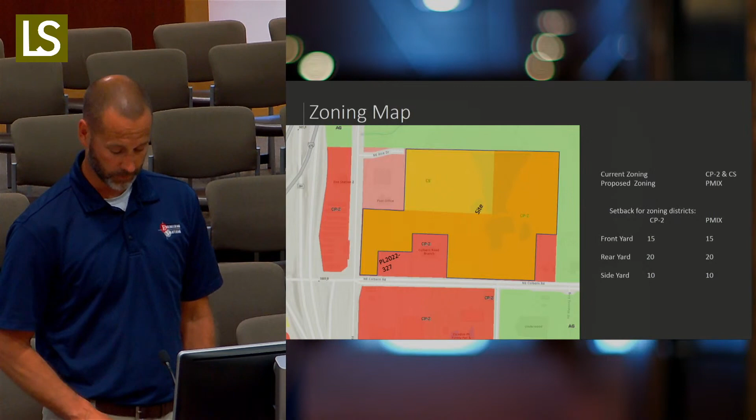We're asking for no modifications for the setbacks, no changes. CP2 standard zoning requirements for the setbacks are completely fine. And the density, there's nothing special on that side.

The comp plan overall shows this as kind of the start of the PRI ground to the north. So this starts to put in some of the road network, some infrastructure, and shows the overall ground as kind of a commercial use. It shows the PRI ground to the north as more of an industrial use, and as we walk through our plan, what we've come up with is a little more of a mixture because there are still some residential components down in that area.

Additionally, we don't believe that commercial development on the entire site is probably the best choice. So what we did is come through on the 37 acres, and again, Rice Road and Colbern's kind of down in the southwest corner looking up at our site.

The C-store or the Heartland Market that you saw is directly to the west of the library. On the westerly and northerly side of that will be some type of office or office warehouse use, staying compatible with the types of uses that are in the area. To the west we have the indoor storage facility, the fire station, the post office, and that marble store that sits on the corner.

The companion case you'll see in a little while will be the senior facility, and we'll talk more in detail about that as it goes along. The common area in the middle will be the retention facility and uses to control stormwater for the overall development, as well as a good portion of the watershed that currently drains through that area.

We've also put in some residential uses, kind of the higher density apartment type use that would be compatible with the senior use as we work to the east. We have some townhome uses on the far east side, expecting that could continue to the east, but this is the end of our property, where the church boundary is.

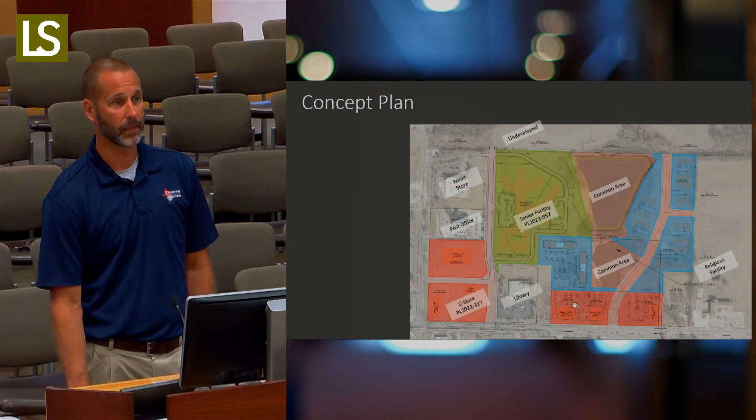Then on the south side, we're currently showing some office, medical offices, something in that version. 12,000 to 14,000 square foot buildings is the idea, individually owned or used, potentially multi-tenant, but mostly some type of office or medical office on that side.

The Heartland Market, which you've seen and already approved, is getting closer to construction. The senior facility, which again we'll talk about more, gives a start of the idea of what we're thinking from a use and look characteristics standpoint.

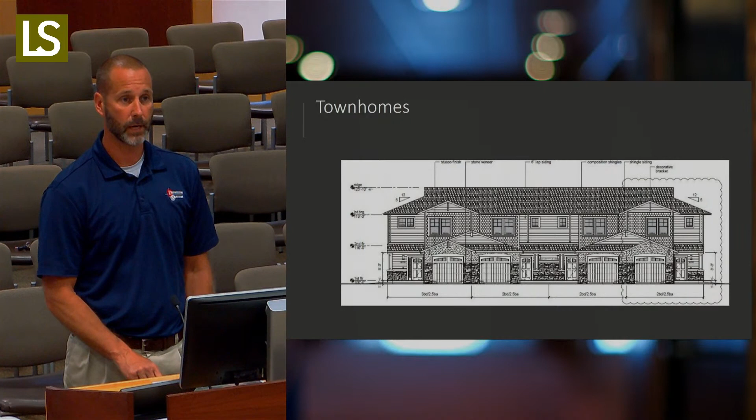The townhomes, which we've seen up in the Chapel Ridge development and other areas, are 4-unit townhomes with garages, 2 stories. The apartment buildings, which again you've seen in that Chapel Ridge area, are the idea that it could be a continuation between the senior and that commercial or townhome type use.

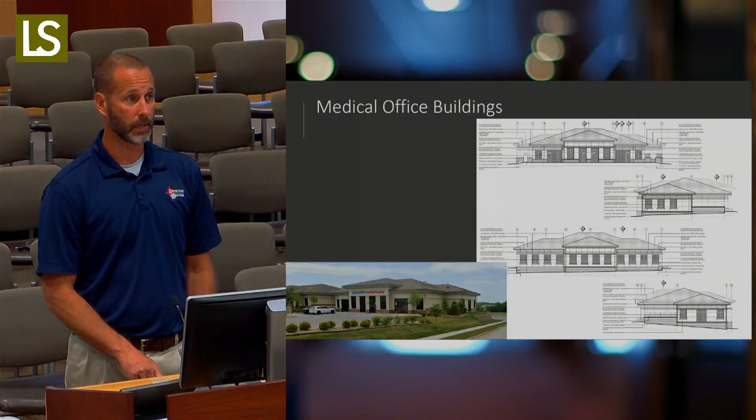And then the medical office use, which you've seen a ton of over in the Chapel Ridge area, a high quality 12,000 to 14,000 square foot building that can be used in a multi-tenant or multi-use type of building.

We did have a neighborhood meeting. No one attended, haven't heard any comments from anyone, so we were able to handle that quite easily. And then we are here for questions. Mike and myself are here if you guys have anything else.

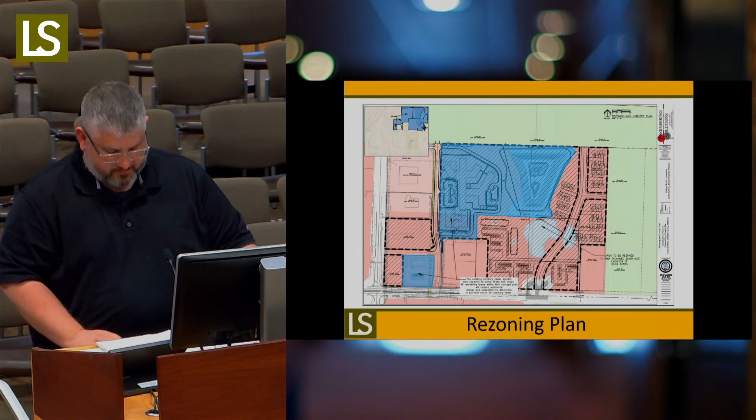So just to go over a conceptual plan, we don't get many of these, so just so we understand what a conceptual plan is, they have provided us a conceptual layout. The proposed uses, as the applicant has stated, is the senior living facility, some medical offices, office space, commercial pad sites, multifamily residential, and medium density residential. The conceptual plan is not intended to replace a PDP, but is rather designed to provide additional flexibility through the design and development process.

A conceptual development plan provides the framework for the phasing of the overall project. All future development of the subject site will require applications to come back before this body as well as city council for future approval of preliminary development plans before any development will be approved.

The proposed PMIX zoning district and conceptual PDP are compatible with the surrounding areas. The Ignite Comprehensive Plan land use map does identify the subject site's future land use as commercial, and should the rezoning be approved, the conceptual land uses and land uses allowed in the PMIX zoning are consistent. An objective established by the comp plan is to stimulate economic growth and development through investment by the private sector, so the subject application does meet that goal by proposing to develop a long vacant property within our city.

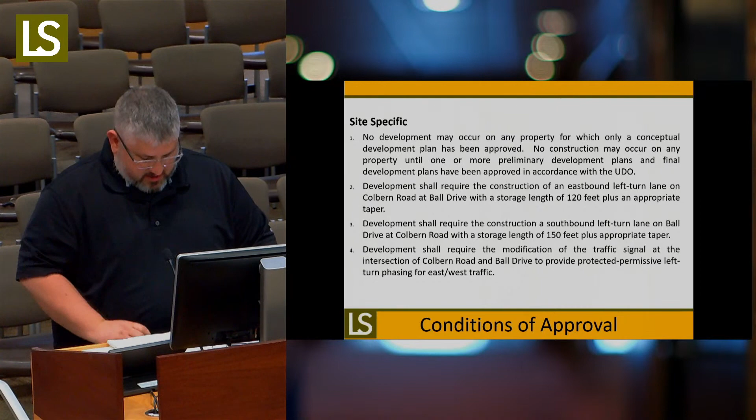With that, there are 4 conditions of approval here. The first condition basically states that no development shall be approved without new PDPs coming through for specific approval. Conditions 2, 3, and 4 deal with the traffic improvements required for the overall development of the site. So with that, staff's presentation is concluded, and I can answer any questions you may have.

Thank you, Shannon. Do we have any comments from the public regarding this application? I see none, so I will move to the commission for questions. Commissioner Benbrook, you got anything for us? Yes, thank you, Chair, just real quick.

So there's currently a road to the north of the plan here, and we have a new Lee Road being constructed toward the east. Obviously those don't meet up. Do we have kind of a preliminary idea of where they will connect northbound? I know there's a lot of undeveloped land up there, I just didn't know if there was some forethought on that.

So your thoroughfare master plan has this. If you start to see, I'll zoom in to help you, but you start to see the red dash lines. The red dash lines do have a connection that starts to come east-west somewhere up in the PRI property. The continuation of our road will continue up and eventually hit into Todd George Parkway, and then it starts to connect some type of network up in there. So the thoroughfare master plan does have those road networks eventually connecting to an east-west that's north in PRI to start the connection back and forth.

Perfect, thank you. And then my other question was, and this is probably for staff, the new road that's being cut in, obviously it's not going to go all the way through and connect. Do we need a turnaround area up in that spot? It looked like just a dead end. I know we're real preliminary on this, this might be asking a little bit ahead of time, more or less from my curiosity, up by the fourplexes.

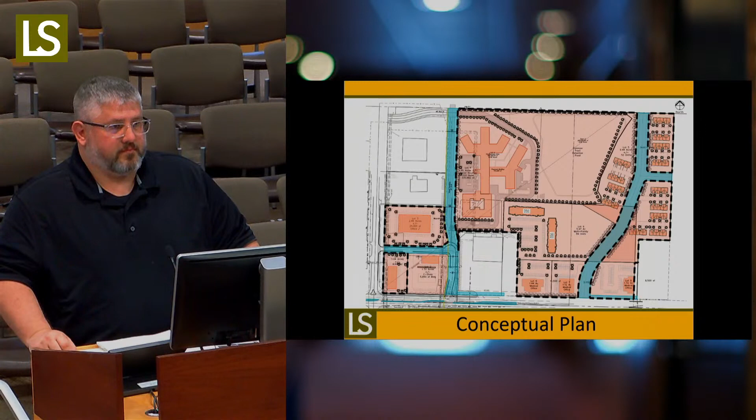I have a question for the applicant, for Matt. On your slides, can you pull up the site plan? Okay, so on this one, I'm just curious, it says religious facility, it's pointing to the pond.

Oh sorry, no, I thought maybe you're doing baptisms there. No, sorry, that does get a little confusing. The arrow is just for the development area, it's for that piece. Oh, religious facility, gotcha, that's the existing church, Lee's Summit Bible Baptist or whatever it is, on the east side of us. Yep. No baptisms. I don't know if that's the highest land use or not. Right, okay.

I know this is very conceptual, but I was curious because we're familiar with Mr. Atkinson's developments through Lee's Summit, and they're always good quality. I assume the townhomes and apartments are going to be similar to the finishes you have in other places, and rental only?

Commissioner Rader: This question is for staff. I just want to understand, so this is a conceptual plan, but we are asking for a zoning change on a conceptual plan? Correct. Okay, so we've probably done this before, but I'm just beginning to get my teeth around this kind of thing. So why would we do that now? Is it instead of waiting until they come back?

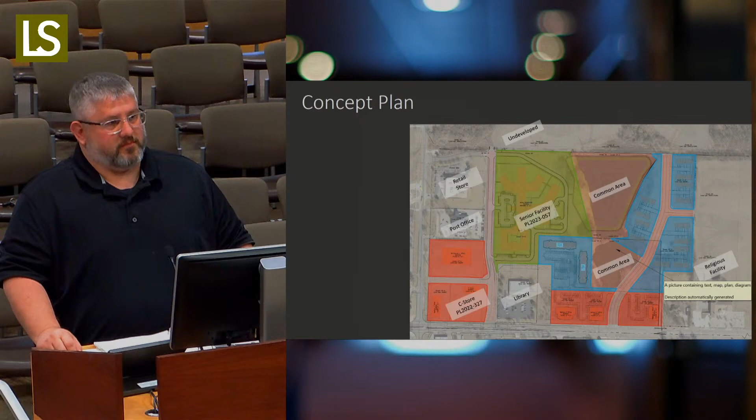Thank you, Shannon, I appreciate it. Commissioner Kitchens: No questions, just a statement that I really, really enjoy the way this one's coming through, so I'll save that for discussion.

Thank you. I think the only question I have, Matt, do you have a rough idea of how many units that apartment would be? I know it's all conceptual. It looks like two. Were we thinking 2 or 3-story buildings there?

Yeah, so kind of piggybacking on your question, the problem that happens when you get to an area like this where we have 40 acres of development and we're trying to do so many mixed-use pieces is lining up the number of developers that want to and are ready to go at the same point gets very difficult. So when we go to a P-mixed concept plan, it allows us the opportunity to put something in place where we think it will fit. So in your case, those are 2-3 story apartment buildings, probably 36 units apiece, so probably somewhere in the neighborhood of 80 units or something like that.

But it allows us to then go find that developer and work with him. Because right now, the need or demand for office medical use buildings is pretty small, and it's tough to develop those areas until we find some users to fit those pieces. So that's kind of the idea we believe works well with this type of zoning application, it allows us to start the process with the companion case and continue to development, like you saw the Heartland Market, the people that are ready, and give you the placeholders of where we think we're headed. Then you guys get to see the PDP each time and comment on each one individually.

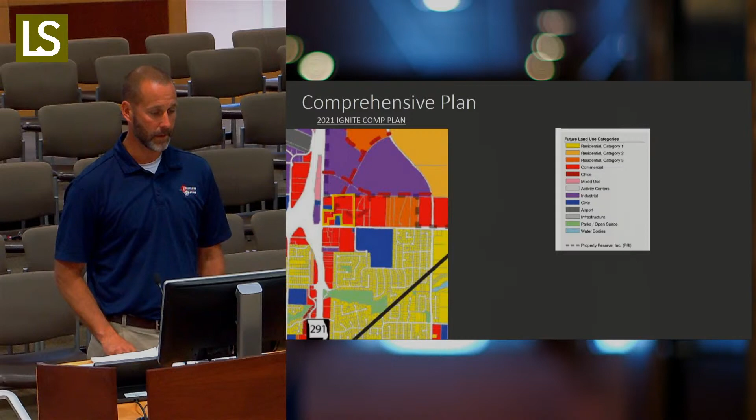So again, zoning map, we've asked for that P-mix. It is compliant with the comp plan. So the site plan you'll see here is essentially a mixture of uses that'll have a senior element involved.

So you have an independent living, an assisted living, and a memory care facility. Overall, there's 220 units spaced out over 3 floors, primarily broken up into zones, so the memory care is on the southerly side, and then the assisted living and independent are flanked out on the other sides of the wings.

There's an underground garage available under the north wing, so we have an indoor garage for the independent living facility, and the remainder of the site will be surface parking. Generally speaking, there's 280,000 square feet of space, and the architect will come up and speak through the uses and the internal sides of it.

From my perspective, the continuation of the road that we've talked about with Heartland Market will get continued up to the north and connect back to the existing westerly road that goes back out to Rice, which eventually will start to go away and continue that development to the north as we talked about.

There's a lot of information on this slide, which we can go through if you need to, but what it essentially does is talk about the memory care having all of them as studio units, the independent living being a mixture of 1 and 2 bedrooms, and the assisted living being a mixture of studios with 1 and 2 bedrooms, and we can start to break out and go through those as we need.

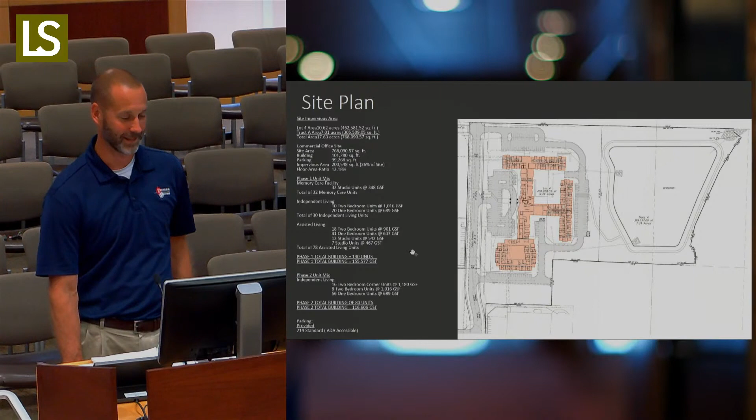But again, Andrew will be much better at talking about the inside of the building because that's his world for sure. So at this time, I'll let Andrew come up. He'll go through the elevations, and then he has a short video to do the fly-through as well, and we'll be there for any questions.

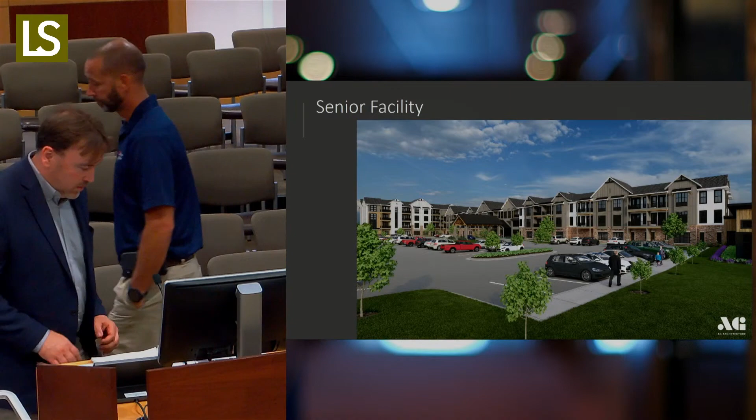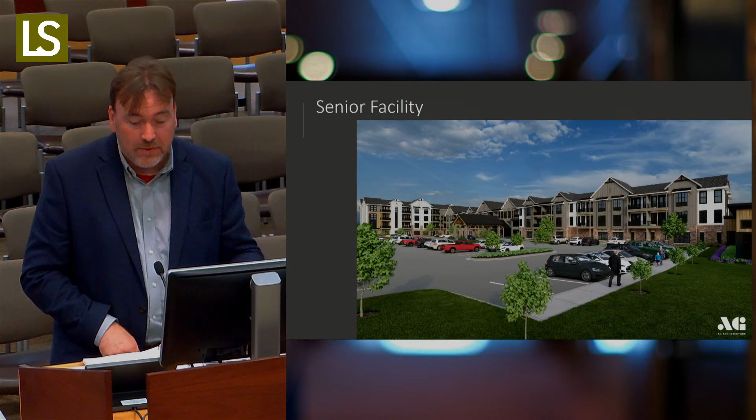So I get the pleasure of talking about the building. I'm very passionate about senior living, so I will try to slow my speech and not get too excited and rambunctious here. What you're looking at is the main entry into the building.

This is a 3-story main entry piece that goes into the commons and independent living portion. Off to the left is a 4-story independent living also, and off to the right, what you can't see is a 1-story memory care. The way the building is designed is it marches up levels, 1 story, 3 stories from the south to the north, so we get good natural light penetration into that secure memory care courtyard.

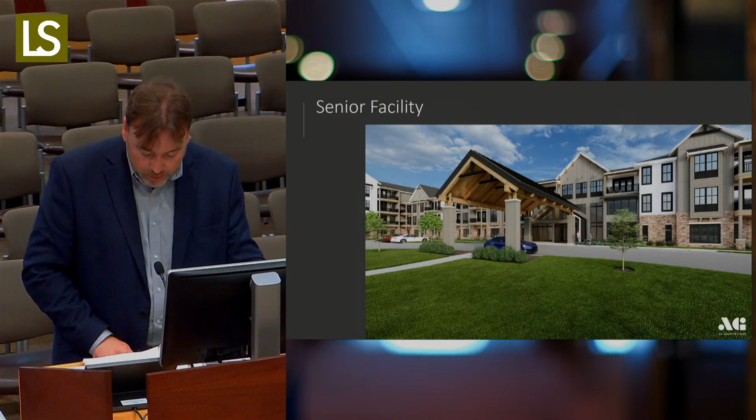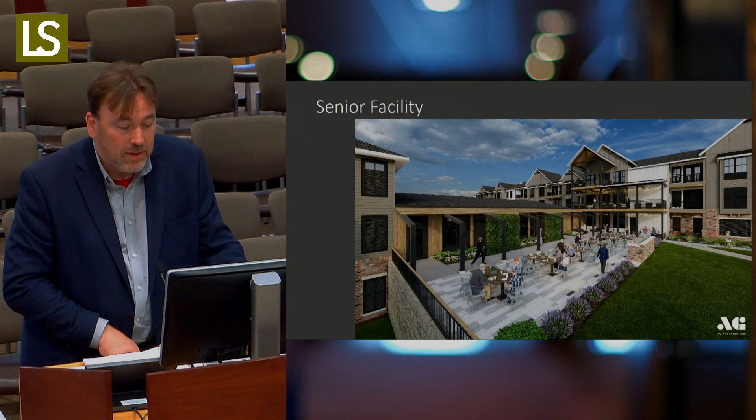And what's kind of hinted here is if you look to the left, the assisted living 3-story is actually set down a level. So we try to work with the grade on the site to reduce the overall mass of the building as it's perceived. We're trying to work with the grade and make it seem less like a large building. It is a large building, but that's okay.

This is looking directly west, so off to the left you have the 3-story assisted living that's set down a level. And off to the right you have the parking garage and 4 stories of independence. And directly in front of you is that entry bar that has independent living on the 3-story piece.

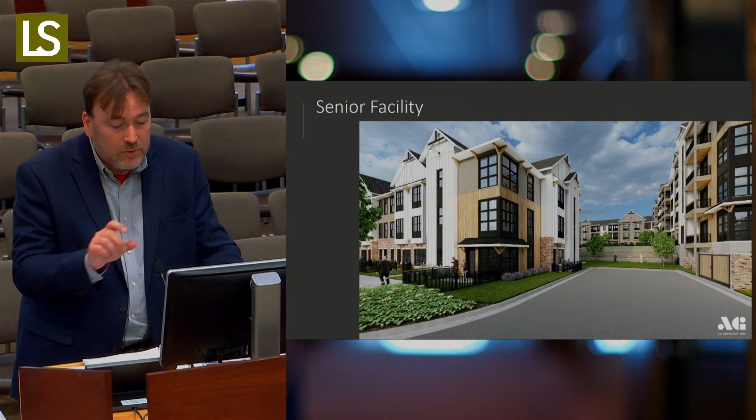Here's a little larger view from the north side of that second phase of IL, so 4 stories of independent living. And even though the building is a little larger, we try to break it down with some articulation in the facade. There's balconies. You notice some of the details up on the gable ends, hearkening back to some of the local vernacular architecture of the farms with the horizontal fiber cement siding and brick. And so trying to have a contemporary agrarian approach to it, something that's contextual but new and innovative.

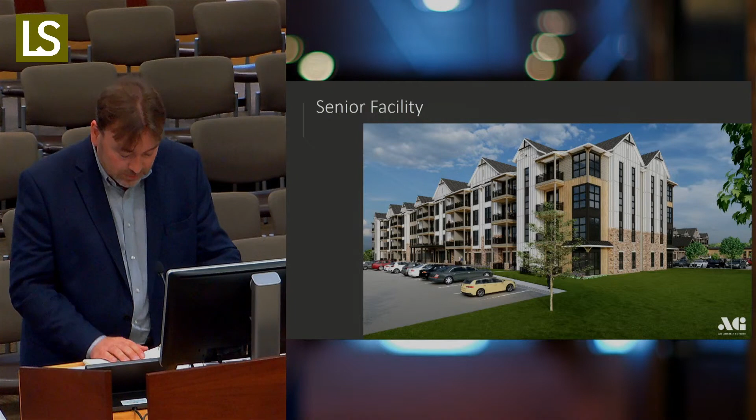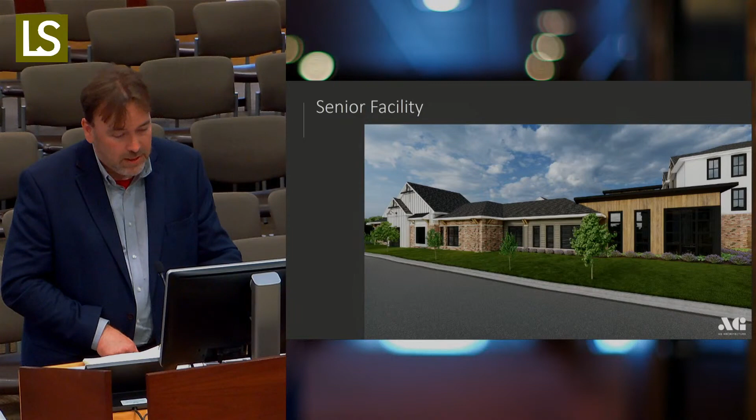Memory care, this is the 1-story piece, and that's the therapeutic courtyard on the inside there. Once again, high quality materials, fiber cement panel, asphalt shingles, brick, details.

And now we're going to go through the animation. So it's basically going to fly you around the building so you get a better idea of what it looks like in form and shape.

Turn down the evocative music a little bit. There we go.

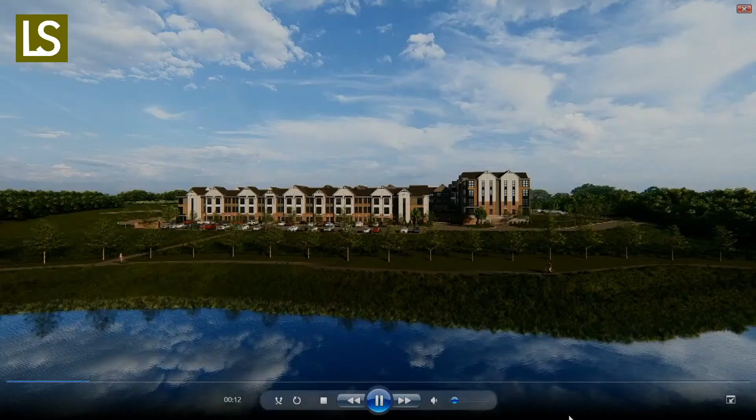So here you're approaching on the east side. You can see that three-story assisted living is set just a little lower.

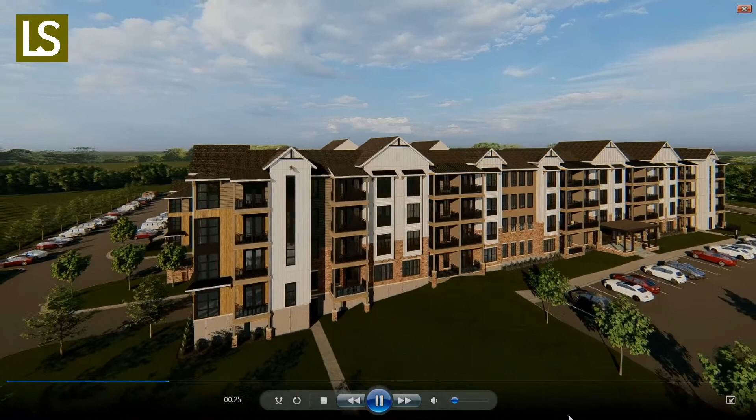You're rotating around the north to the second phase of the four-story independent living, with parking also associated with that. And here's the main entry into that commons bar, which is connecting everything on the west side.

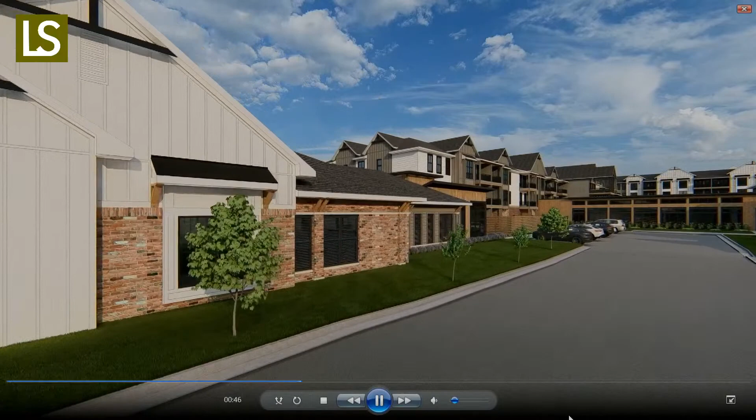There's a single-story memory care moving quickly through there. Some back of house area, all appropriately screened for transformers, generator locations, and garbage and recycling. It's our main dining room right in front of us there, and then you're looking at that assisted living building set down.

Here's the east side with some dedicated yard areas, everybody out enjoying the weather with their pets. That's right off the apartments.

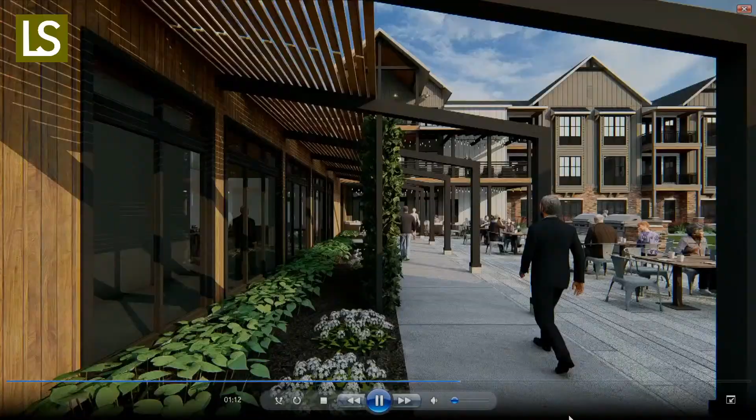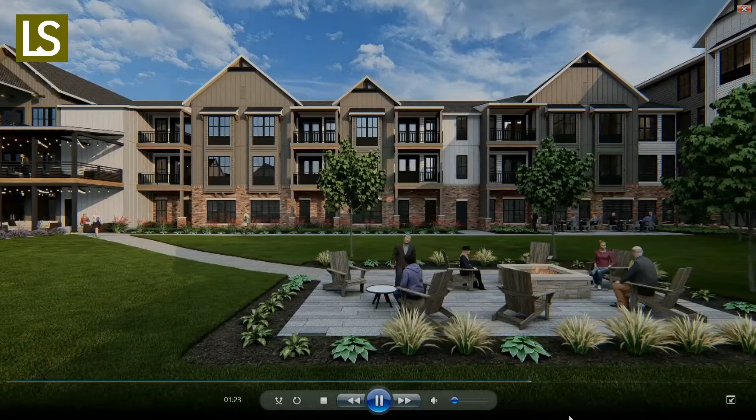That main dining area, the triple level outdoor access on the commons bar. There will be outdoor amenities, fire pits, raised garden beds. That really hasn't been developed very well yet, but this gives you an idea of what might be there. Once again, that outdoor dining space, outdoor grilling options also.

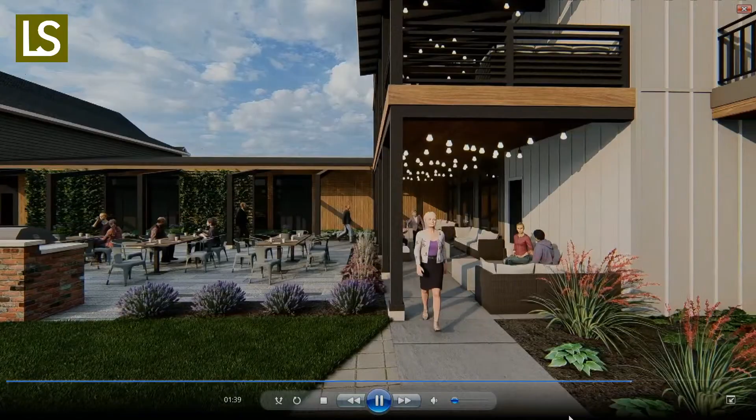And I think we end with just a pull back overall shot looking from the west. Once again, it is a larger building, but trying to break it down in form with articulation of the exterior walls and the roof, and I'd be happy to answer any questions that you might have. Thank you.

Staff have a presentation for us? No movie? I thought I seen Mr. Atchison in that video. We'll start the conversation saying that staff's budget's a little bit lower, so we don't have anything pretty like that.

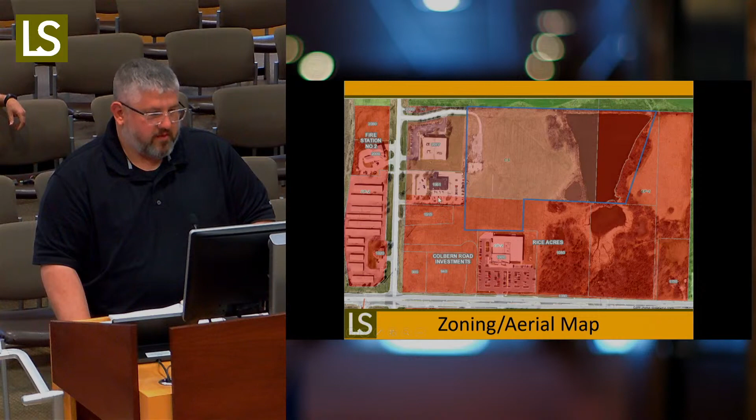The applicant is seeking approval of the PDP to construct a 272,000 square foot senior living facility. The proposed development will include the three different uses the applicant stated: memory care, independent living, and assisted living components. This subject application is limited to just the PDP before us, the senior living facility, and no other lots are being proposed for development at this time.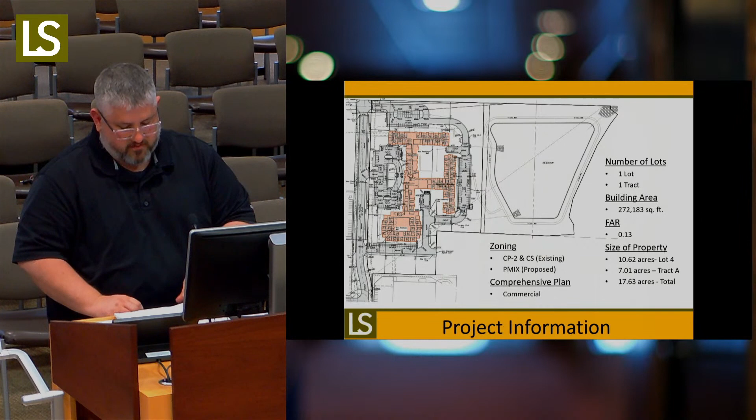The applicant did a pretty good job of showing the elevations, but I want to quickly go through the proposed materials: brick, fiber cement panels, some lap siding, some Nichiha panels, asphalt shingles, and standing seam metal roofing. The proposed building materials are compatible with the design and construction of existing senior facilities, as well as other structures throughout our community.

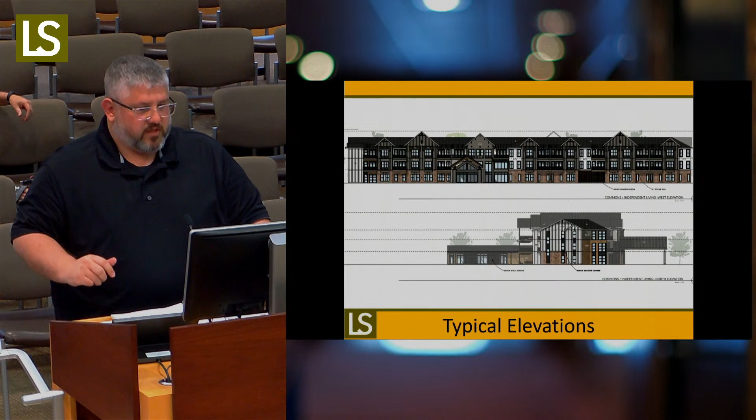The comprehensive plan land use map identifies this area as commercial in the future land use map. The city has committed to participate in Mid-America Regional Council's Communities for All Ages. The goals of this program were established to create and implement plans and policies to address the city's changing demographics. The proposed senior living facility meets this goal by providing a range of living and care options to senior residents. The spectrum of proposed living and care options will afford residents an opportunity to age in place. The subject application meets this goal by developing accordingly. One other objective established by the comp plan is to stimulate continued economic development and investment by the private sector, which the subject applicant also meets. So in addition to the economic goals in the comp plan, the subject development meets multiple goals throughout the comp plan by creating additional housing and care options for our residents.

There are three conditions of approval for this application. Condition 1 states that development shall be in accordance with the preliminary development plan submitted. Condition 2 states that all development shall be in accordance with the transportation impact analysis by Susan Berry. Condition 3 states that this PDP is conditional on approval of the rezoning in the companion application previously heard. That concludes staff's presentation; I can answer any questions you may have.

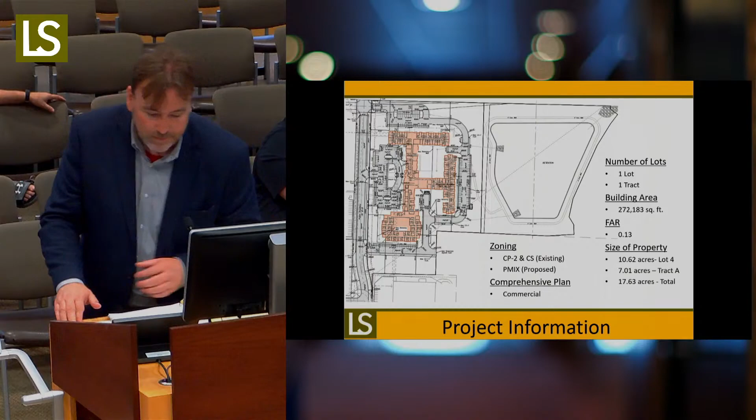Very good, thank you. You're welcome. Commissioner Kitchens, any questions on your end? Yes, just one for the applicant, please.

It has to do with the interior design, so I'm guessing that'll be Andrew. Yes, go right ahead. Hi. So one of the things most of these facilities have to follow is CMS standards, Centers for Medicare and Medicaid Services. They have a whole bunch of emergency preparedness requirements on this.

My biggest question whenever I look at any of these facilities - obviously you have the generator, which you noted for backup - is the secure access portion for emergency evacuation of the facility. In other words, I'm looking at the roads around there. I'm not very good at telling how many ambulatory service vehicles could go in there, but I do know there is a requirement. Just making sure you guys are crossing your T's and dotting your I's.

You have had somebody check that requirement from CMS, correct? Yes, and this building is incredibly safe. It's designed - that's on the record now. There's firewalls, smoke barriers, it's fully sprinklered, and it's staffed 24/7. So from that point of view, it is a very safe building.

Evacuation-wise, the operator does have a requirement for plans of evacuation. That's part of their standard operating manual, in addition to I don't remember how many exercises they have to do, practice runs. So that is something that they will take into consideration. As we consider the building, they consider the operations, and we work together.

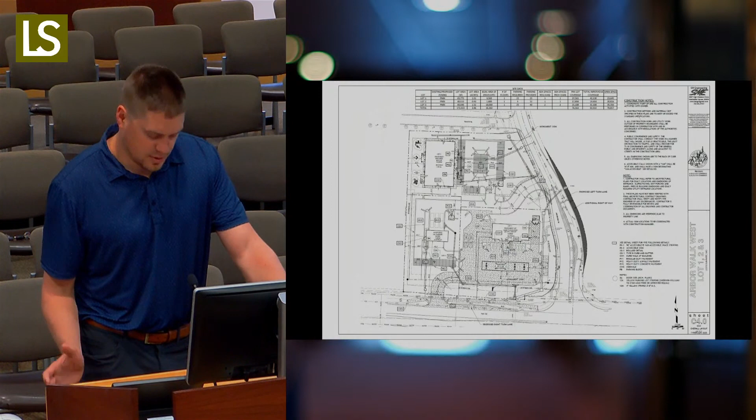This is a continuance, so you've already seen this exact site plan, but it's with the switched access on the preschool or early education center. So coming in off of Arbor Ridge Road, and then adding the right turn in, right turn out off 150. This is the proposed Casey's, which is under contract. Daycare lease is signed. This is conceptual right now - it's shown as an oil change, but obviously could be subject to change.

I think this is just here, the truck routes for the traffic.

Elevations for the education center. This is actually from their one off 121st Street in Overland Park, Kansas. They have two in Overland Park and one in Liberty. They're open now, I think, and a few more in the Kansas City Metro that they're working on.

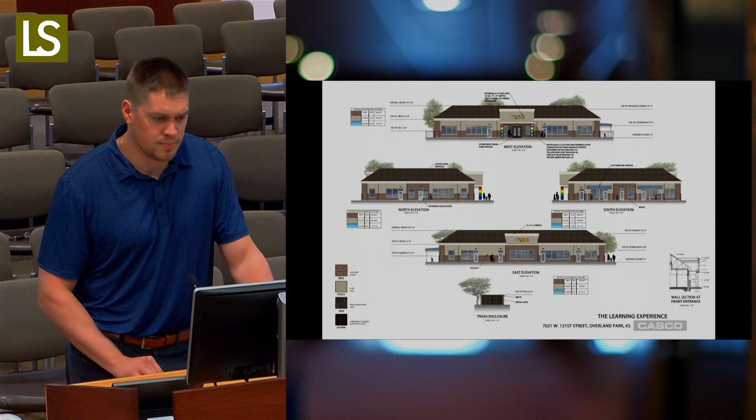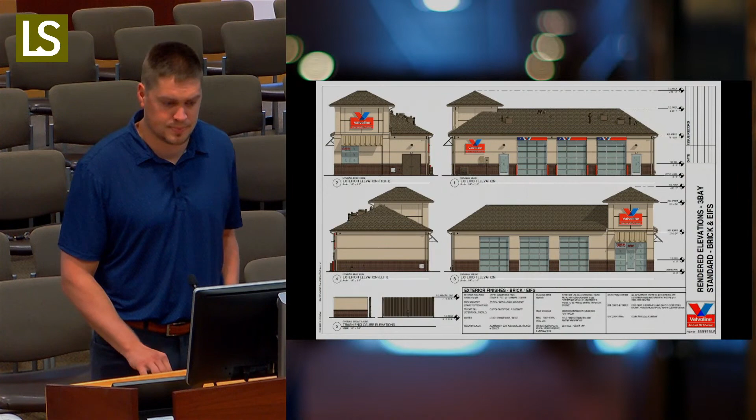That's really all we have. Staff, you got a presentation for us? Thank you.

Shannon McGuire, staff planner, please enter on record Exhibit A, list exhibits 1 through 19. 1 through 19 noted and entered into the record.

As the applicant stated, this is a continuation of a previous hearing, so I won't repeat much of that presentation before. What I do want to do is highlight some of the changes that were made to the proposed layout and some changes that occurred with that proposed layout change.

On this slide, with the proposed alternate change to the entrance to the daycare, that did alter the proposed parking. It reduced it from 44 to 42 proposed, which is well over the minimum required. The applicant also reconfigured the entrance on 150 and slid the proposed Valvoline oil change back a little bit. With that change, they've increased the parking provided there from 6 to 12.

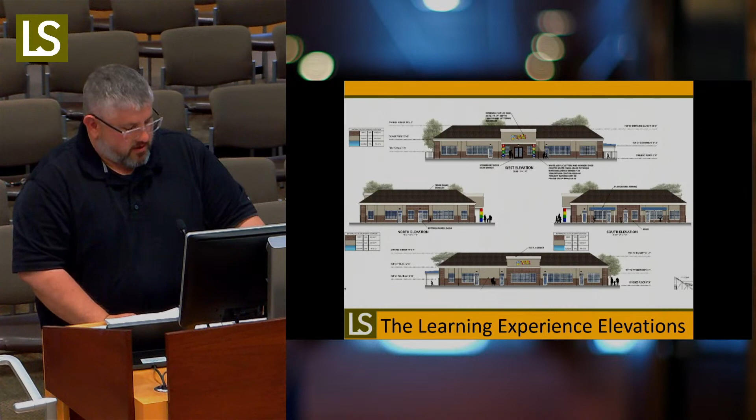Again, the elevations for the daycare include materials such as stucco, brick, and glass. With Casey's, we got mostly brick, stone, and glass as well. The Valvoline has brick, glass, and some cast stone. The comp plan does show the area as commercial.

With the changes that are proposed, I wanted to highlight so you can compare the two. Previously, the daycare was accessed through a shared use model with the church. That has since been updated and changed to the south side here, accessing the site from the east again.

And then the other change - they reconfigured the 150 entrance from this configuration to more this configuration, where they slid the building back and changed that up a little bit.

So with that, there are two conditions of approval. The updated condition is that the development shall be in accordance with the preliminary development plan dated April 14th - that's the new one included in your packet as the updated site plan, as well as the elevations provided. The other condition is that all development shall be in accordance with the transportation impact analysis prepared by staff. With that, I can answer any questions you may have.

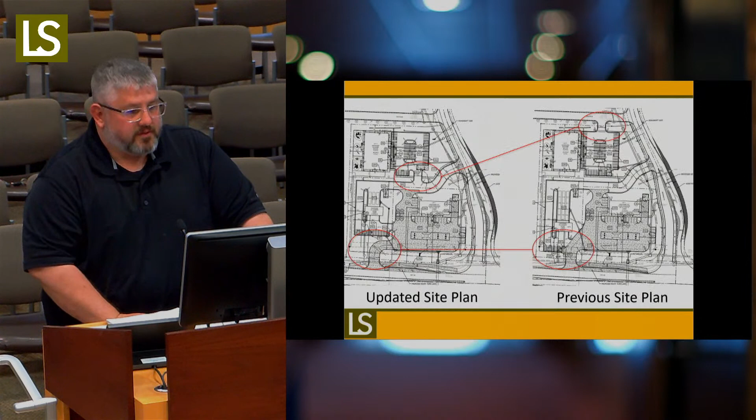Thank you, Shannon. Chairman, Josh here. I wanted to point out that in the ordinance and everything, we probably shouldn't have the elevations based on the business, but rather the date stamp of the drawings. As the applicant said, this may not be a Valvoline - if we get an oil change facility and it's generally made of the same materials and it's generally the same height, bulk, and scale, we would let them move on through an administrative approval. I just wanted to point out that it doesn't have to be a Valvoline to go in there.

Before we went to public comments, two things if Shannon or Josh could clarify. One, all of the signage shown on the building is just a conceptual drawing - we'll come back with sign applications, correct? Correct. There's a couple different processes the applicant can take to have signs approved. If they are meeting all UDO requirements, it would just come through a staff approval, sign permit approval. If they were going to request any kind of deviation from the UDO, there's two methods for that. One would be during the PDP approval process - that has not happened here, so we're not going down that route.

The other route would be if they want any kind of modification to the UDO, size, height, or bulk, or number, we can come through with a sign application, and that would be brought before the Planning Commission for approval at that time.

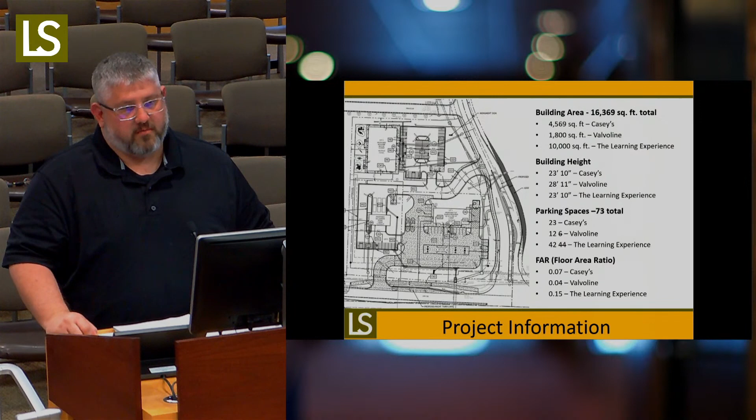Okay, Josh, where I was going is if this is not a Valvoline, would it come back through the commission? So if it's a similar business, an oil change facility, but not a Valvoline, and generally the same height, bulk, and scale with similar materials, then it wouldn't come back through.

If it was a coffee shop, would it come back through? Yeah, a coffee shop would trigger a substantial change due to the drive-through nature of it and the increased traffic count, so that would require it to come back.

Thank you, Shannon. I will open up for any public comments on this application before we move to the commission. Yes, sir, if you come forward and state your name and address for the record. Larry Ante, Director of Facilities for Holy Spirit Catholic Church. We border on the west and the north of the property, 1800 Southwest State Route 150.

In general, we don't have any qualms with anything that's going on, but I would like to reiterate that we really would like to see that access on 150, the right in, right out, split the lot line. It serves MoDOT's desires to have fewer entrances onto their highway, as well as servicing as many properties as possible, and from a safety standpoint it moves it further from the light going in at the intersection of Arbor Ridge and 150. So I just want to be on the record that we would still like to see that moved to the west and split the lot line right there.